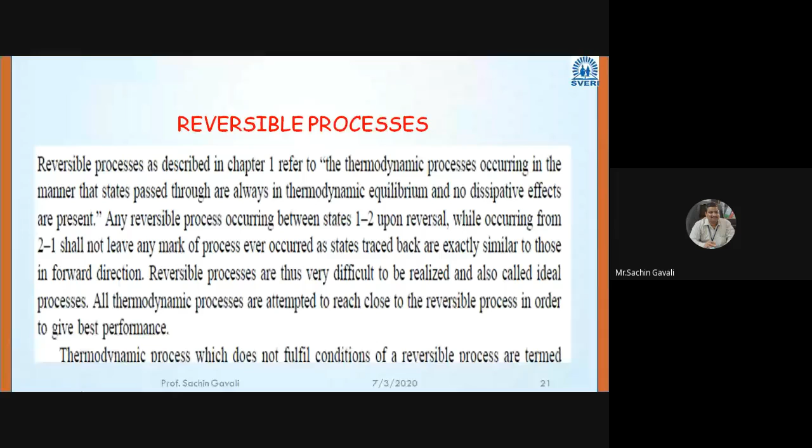The second thing is that both system and surrounding should come to the original state. It should not happen that only the system comes to the initial state but the surrounding does not. That kind of process we cannot call reversible. Both system and surrounding should come to the original initial state, then we can call it a reversible process.

Sometimes the system may come to the initial condition but the surrounding does not. In that case, to come to the initial state, the system has to take some extra amount of work or heat from the surrounding, so the system leaves a trace on the surrounding. This should not happen in case of a reversible process.

Both should come back: if in the forward direction the system has given the surrounding 10 kilojoules of heat, in the reverse direction the system should take 10 kilojoules of heat from the surrounding to come to the initial state. It should not happen that while reversing it takes some extra amount of heat. Within 10 kilojoules only, the system has to come to the original state - both should come to the initial state.

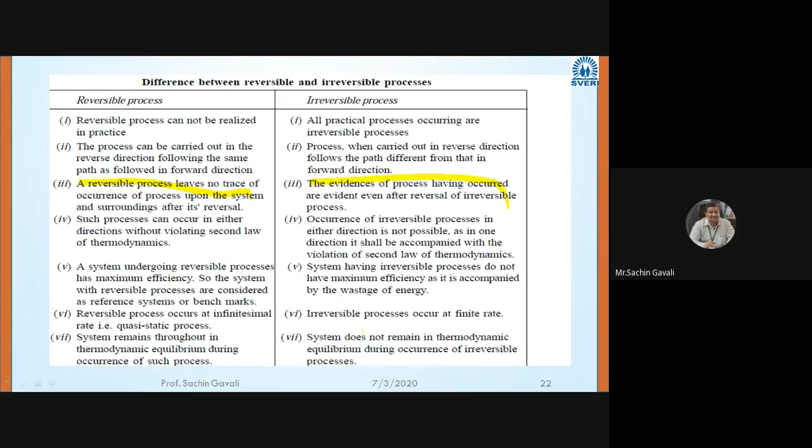There is always thermodynamic equilibrium between system and surrounding at every stage in a reversible process. But in irreversible processes, there is no thermodynamic equilibrium at every stage between system and surrounding. There are examples of this.

Very few processes are considered reversible processes. For example, frictionless motion, controlled expansion and compression, elastic deformation, and electric current where no resistance is present.

But irreversible processes - all other processes in the universe are irreversible processes. For example, viscous fluid flow, inelastic deformation, hysteresis effect, and free expansion. All these are considered under irreversible processes.

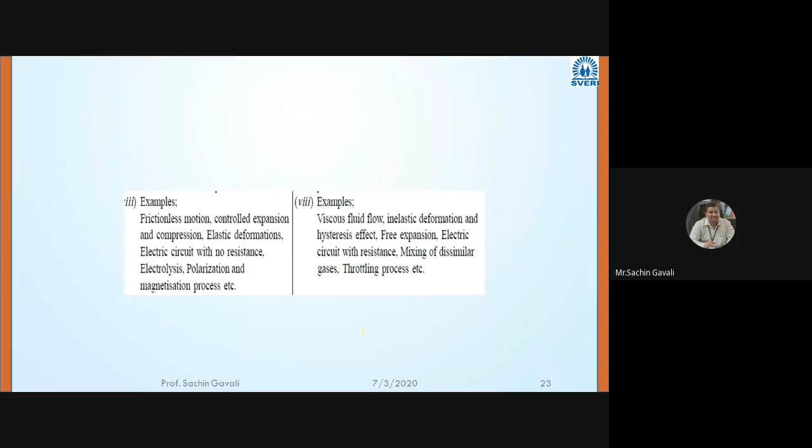So only a few processes, where the rate of compression and expansion is infinitesimal and the rate of heat transfer is infinitesimal, are called reversible processes. Other than reversible, everything else is irreversible.

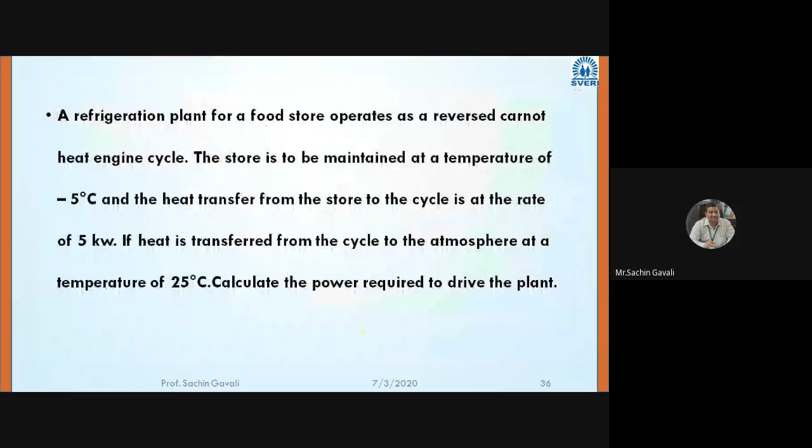Afterwards we take up one cycle which consists of all reversible processes, and that cycle we discussed is the Carnot cycle. This cycle was suggested by Sadi Carnot, and it consists of all four processes as reversible processes. Since in the universe very few processes are reversible...

Hence it is very difficult to achieve the Carnot cycle. As reversible processes are very few and do not occur in the universe, the Carnot cycle remains only on paper, a dream cycle, or purely hypothetical phenomena. Therefore this Carnot cycle remains an ideal or dream cycle, and it consists of a piston and cylinder arrangement, considered frictionless since we don't want friction between piston and cylinder.

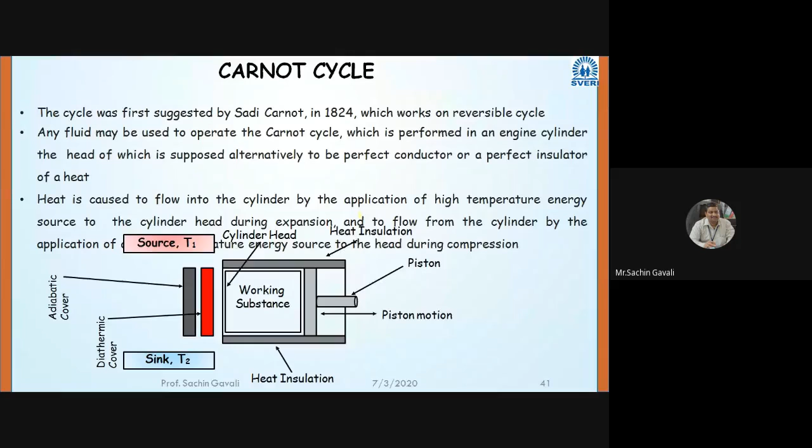Then all four processes are there, as assumptions we have made: the piston moving in the cylinder does not develop any friction during motion; the walls of the piston and cylinder are considered perfect insulators of heat; then the cylinder head...

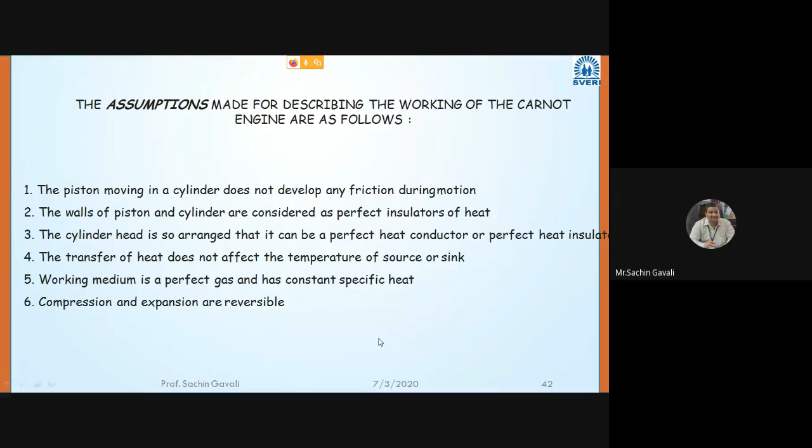Transfer of heat does not affect the temperature of source and sink, because both source and sink temperatures always remain constant. Then we move on to the four different processes.

Isothermal expansion is the first process. Second is adiabatic expansion. During isothermal expansion, heat is supplied, so some books refer to this first step as heat addition at constant temperature, or isothermal heat addition.

This is adiabatic expansion - we are getting work from the fluid, and work is obtained from this process.

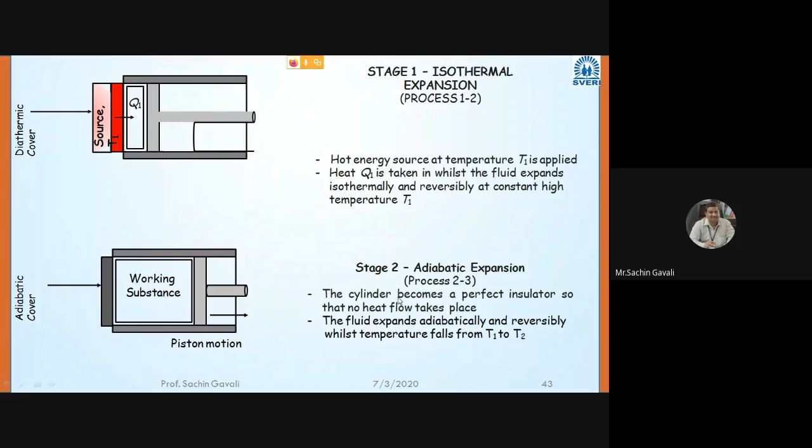Next is isothermal compression, or heat rejected at isothermal condition, isothermal heat rejection - stage 3. In some books this is written as heat rejected isothermally or isothermal heat rejection. The last stage requires us to supply some work in compression.

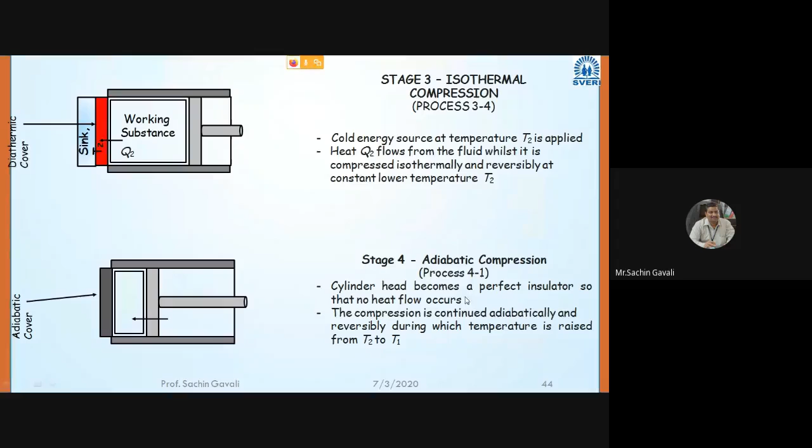That is adiabatic compression. So these four steps are there.

This is isothermal heat addition here. One to two process is isothermal heat addition where Q1 amount of heat is added.

We will now simultaneously go for two diagrams: PV diagram on the left hand side, and TS diagram on the right hand side.

In the PV diagram, 2 to 3 is adiabatic expansion, where we get work W from this process. Then 3 to 4, here we are rejecting heat, Q2 amount of heat. And 4 to 1 is adiabatic compression, where we have to supply work for the pump.

Here, 1 to 2, T1 is equal to T2 during heat addition, and T3 is equal to T4. But for simplicity, we consider T1 as the heat addition temperature, and T3 equal to T4 as T2, the heat rejection temperature.

Now, as we have learned, isothermal heat addition is given by the work obtained during that process, because cyclic integral of work equals cyclic integral of heat. Therefore Q1, the amount of heat supplied, is equal to the work done during the 1 to 2 process.

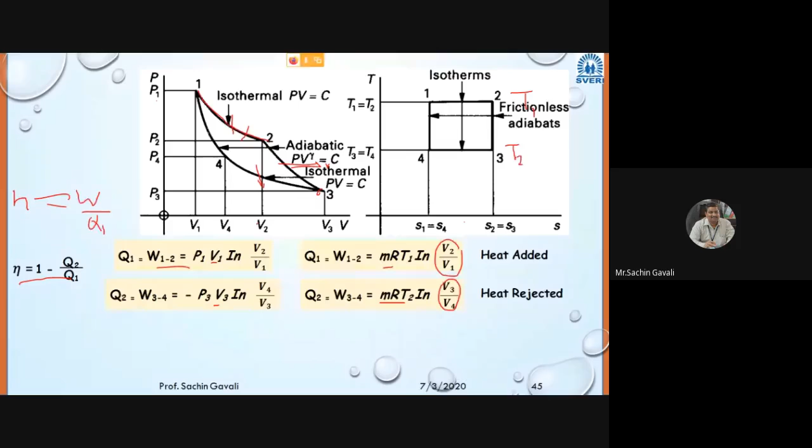For that we take the help of the remaining processes: adiabatic expansion and adiabatic compression. First, adiabatic expansion 2 to 3: P2 V2 raised to gamma equals P3 V3 raised to gamma, equation 1. Then adiabatic compression: P4 V4 raised to gamma equals P1 V1 raised to gamma, equation 2. Then by PV equals nRT.

Therefore PV by T equals nR equals C, we also consider that. Then P2V2 upon T1 equals P3V3 upon T2 — this is the ideal gas equation. Then P4V4 upon T2 equals P1V1 upon T1, which is also valid here since we considered the gas as an ideal fluid.

Now rearranging mathematical terms, dividing equation 1 by 3, after applying all conditions we get T1 times V2 raised to gamma minus 1 equals T2 times V3 raised to gamma minus 1. Dividing equation 2 by 4, we get T1 V1 raised to gamma minus 1 equals T2 V4 raised to gamma minus 1.

Then if we divide this equation by that one, the T1 terms get cancelled, and this term becomes V2 upon V1 raised to gamma minus 1 equals V3 upon V4 raised to gamma minus 1.

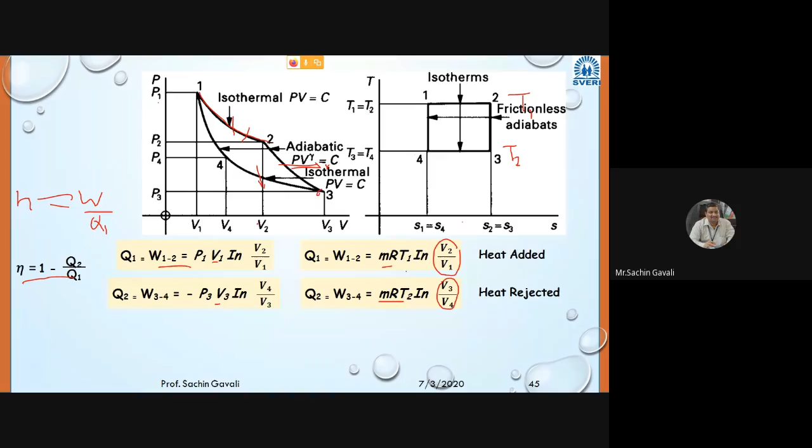As we know, equation eta is equal to 1 minus Q2 upon Q1. So this indicates, what will be there in Q2 upon Q1? From the previous slide, V2 upon V1 is same as V3 upon V4. Therefore, ln of V2 by V1 and ln of V3 by V4 will be same, so mR will also get cancelled, and this will become T2 upon T1. So finally, the efficiency of Carnot cycle engine or reversible cycle engine is given by equation eta is equal to 1 minus T2 upon T1.

Now this is the expression for efficiency of Carnot cycle, given by this expression. This indicates that efficiency of Carnot cycle is a function of only two temperatures.

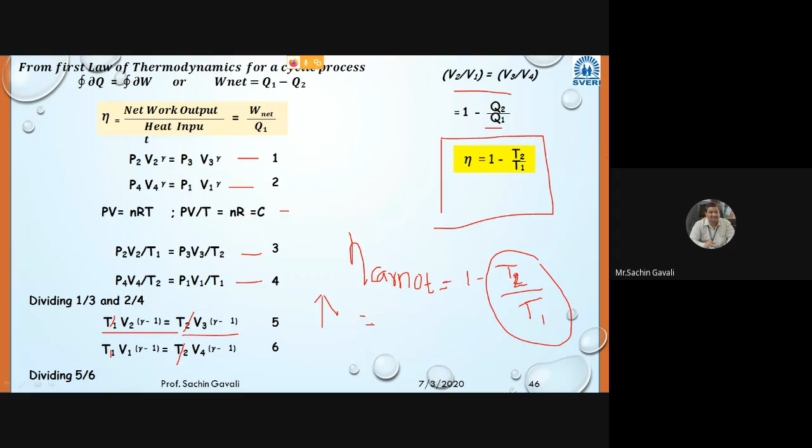Forget about other cycles, but ideal cycle efficiency is also not 100%. So this we have completed. Then here we have gone for the diagram: 1 to 2 heat addition, then heat rejection Q2, then we are getting the work here. We get work, and here we have to supply the work.

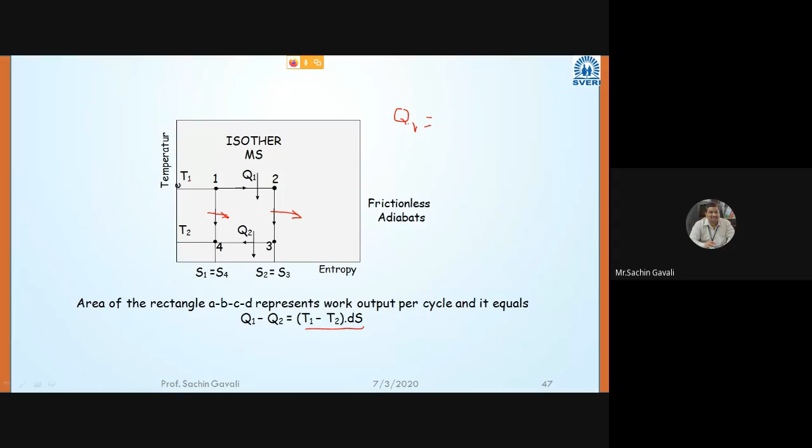So heat supplied in that isothermal process, you can say heat transfer is equal to change in entropy S2 minus S1, but S3 minus S4 and S2 minus S1 both are same. Therefore, we can say it is temperature T1 at which T1 into ds. And similarly, heat rejected Q2 is equal to S3 minus S4, equal to delta S. Both are same, coming same ds. Therefore, Q2 is equal to T2 into ds.

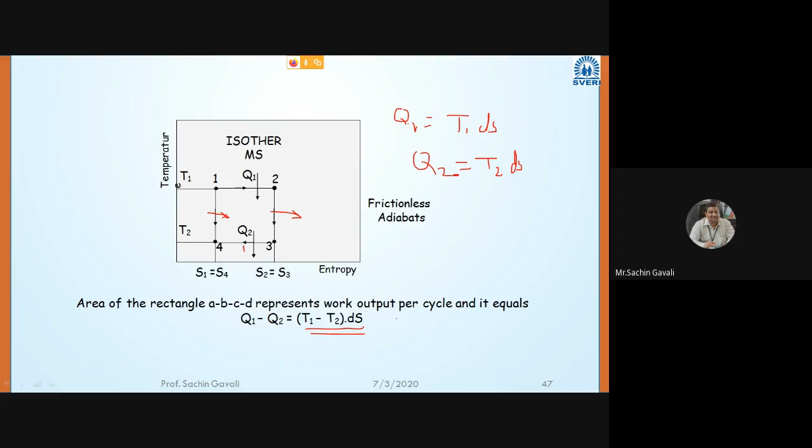And therefore, Q1 minus Q2 is equal to work obtained, net work obtained is coming as T1 minus T2 into ds. And efficiency again, simply as per whatever derivations we referred before, this can also be simplified as eta Carnot is equal to 1 minus Q2 upon Q1 reversible, or you can say Q1 minus Q2.

It can be written as Q1 minus Q2 divided by Q1. Here Q1 minus Q2 is equal to ds T1 minus T2 into ds. T1 minus T2 into ds divided by Q1 is nothing but T1 into ds. Change it, ds is going to be same, so ds will get cancelled, and efficiency formula will become eta is equal to T1 minus T2 divided by T1, or simply 1 minus T2 upon T1.

So I request you to note down the formula. For Carnot cycle efficiency, we say eta. Carnot cycle is a maximum cycle, it is an ideal cycle. Therefore, efficiency of Carnot cycle is always maximum. Though it is less than 1, it is maximum compared to other irreversible cycles. Therefore, eta reversible is equal to eta maximum, given by equation 1 minus Q2 upon Q1 reversible, or 1 minus T2 upon T1.

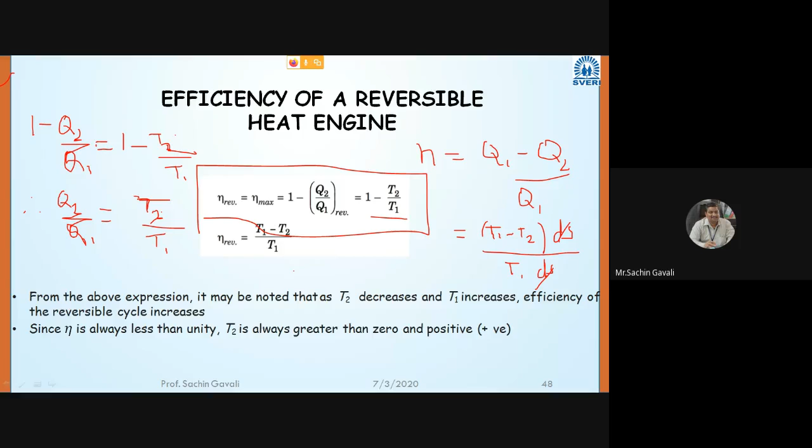1 minus 1 minus will get cancelled. Therefore, for Carnot cycle, we see that Q2 upon Q1 is also equal to T2 upon T1. So note down this: Q2 upon Q1 is equal to T2 upon T1. So 1 minus Q2 upon Q1 is also equal to 1 minus T2 upon T1, therefore Q2 upon Q1 is equal to T2 upon T1. This is also valid for Carnot cycle. So T1 minus T2 upon T1 is equal to Q1 minus Q2 upon Q1. It is valid only for reversible cycles or Carnot cycle.

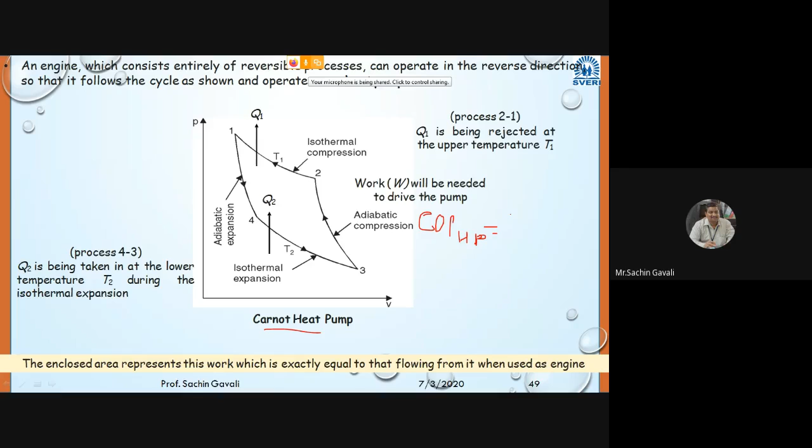Write this down also in your notebook. For Carnot heat pump, COP of heat pump is equal to, what is our formula? Q1, heat supplied. We are interested in heat supplied divided by net work W.

This W is equal to what? We know it is equal to Q1 divided by Q1 minus Q2. So this formula everybody should remember. Write down: COP of Carnot heat pump is equal to Q1 divided by W, which is equal to Q1 divided by Q1 minus Q2. This is also valid, and there is validity for this. Write down for Carnot heat pump.

Again, temperature ratios are also the same. Q1 divided by Q1 minus Q2 is also equal to T1 divided by T1 minus T2. This is also valid for Carnot heat pump only. So when a numerical problem comes for Carnot heat pump, what do we write? Q1 divided by Q1 minus Q2 is equal to T1 divided by T1 minus T2. This is for Carnot heat pump.

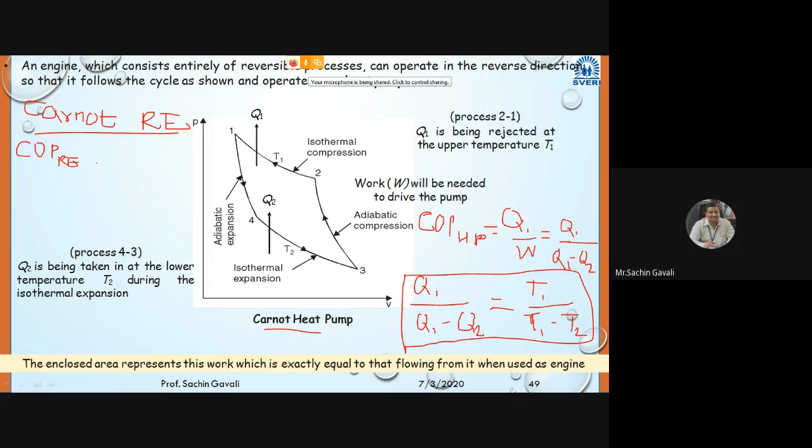COP of refrigerator is equal to what? Now what is the intention for a refrigerator? Anybody? Is it heat absorbed or heat supplied? Somebody can reply so that I can get that response. For a refrigerator, what is the input? What is expected? How much amount of heat absorbed or supplied?

Q2 is supplied, Q1. So if we consider the cycle of a refrigerator, heat is absorbed, meaning Q2 amount of heat is absorbed. So our intention is Q2 divided by work W. We know that W is equal to Q1 minus Q2. Therefore it becomes Q2 divided by Q1 minus Q2. Remember that.

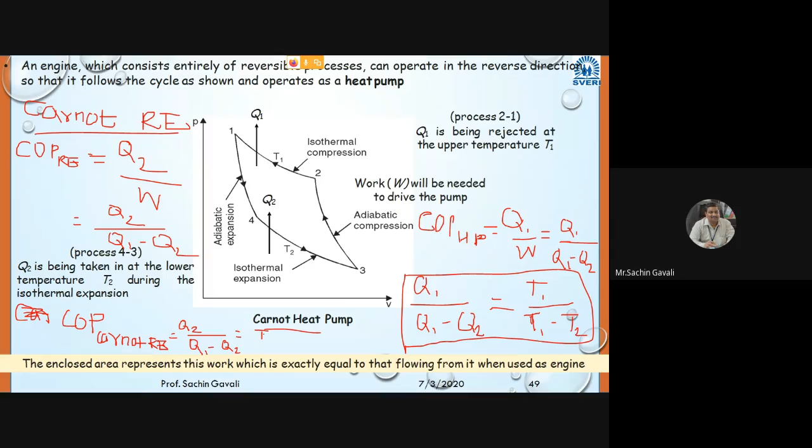For a Carnot refrigerator, Q2 divided by Q1 minus Q2 is also equal to the temperature ratio. Therefore, T2 divided by T1 minus T2. Write down the formula.

Carnot refrigerator COP is also given by heat interactions: Q2 divided by Q1 minus Q2 is also equal to T2 divided by T1 minus T2. So whether it is Carnot cycle engine, heat pump, or refrigerator, COP or efficiency are also functions of two temperatures: the heat addition temperature and the heat rejection temperature.

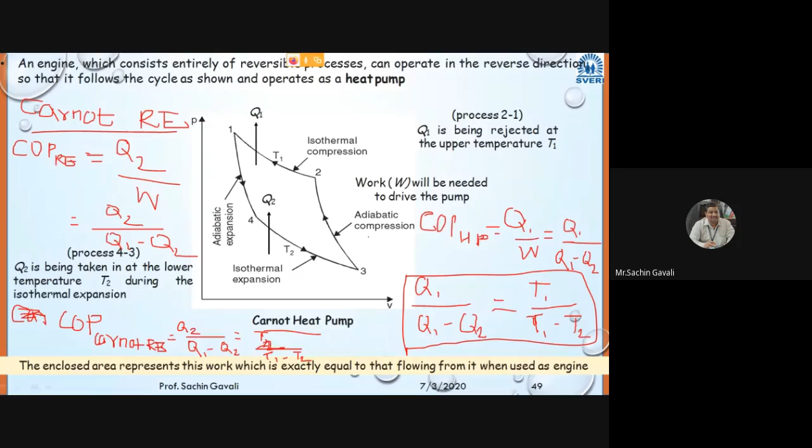So this is general, in terms of heat. These formulas are general; they may be applicable for reversible cycles or irreversible cycles. Everybody has to remember this formula. Without it, we cannot solve the numericals.

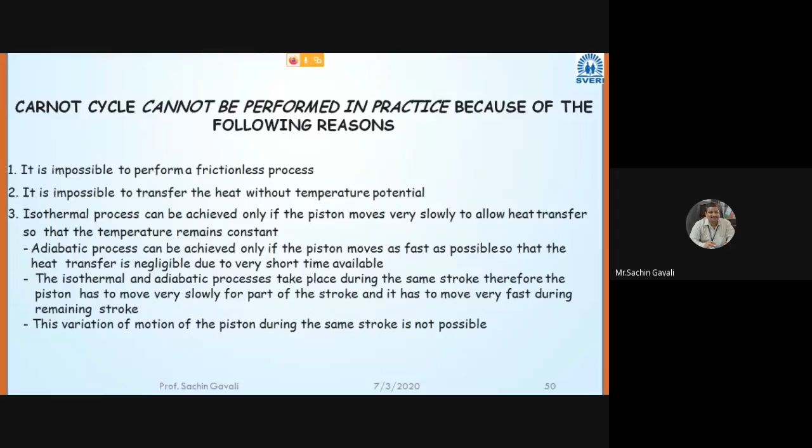Carnot cycle cannot be performed in practice because of the following reasons, which we partially covered. It is impossible to perform a frictionless process; there is always friction present between two things. Also, it is impossible to transfer heat without a temperature difference, meaning isothermal heat addition and isothermal heat rejection are not possible.

An isothermal process can be achieved only if the piston moves very slowly, that is, quasi-statically, to allow heat transfer at an infinitesimal temperature difference. Due to these reasons, isothermal heat addition and rejection are not possible, and a frictionless process is impossible. If the piston moves fast, the quasi-static process is not possible either. Therefore this cycle remains only on paper; it is not practically possible. Carnot cycle is only a theoretical, ideal, hypothetical cycle, not giving any idea about the actual case.

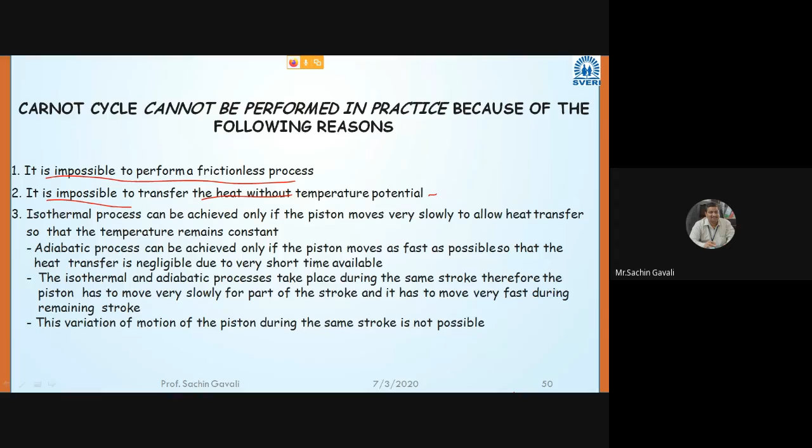We covered the Carnot cycle that day, but I am taking revision because there was a sound problem and some visibility issue, so I am going through it again slowly. That day I had not asked you to write down the formulae, but today I realized that without formulae you cannot solve the numericals.

Is it okay? Somebody can reply, otherwise I feel I am only speaking. Are you watching or not? Yes sir, there should be some interaction.

Now, that day I think we also covered the equivalence of the Clausius statement to the Kelvin-Planck statement, or in general, the equivalence of the second law of thermodynamics, because both the Clausius statement and the Kelvin-Planck statement are statements of the second law of thermodynamics. So it is simply called the equivalence of the second law of thermodynamics.

Now, what is equivalence? These two statements: if we look at the Kelvin-Planck statement, we apply it for heat engines, so I'll write it in short as KP for heat engine. The Clausius statement we generally apply for heat pumps. If we study both statements of the second law, Kelvin-Planck and Clausius, both are different, the wording is different, and physically they also look different. Kelvin-Planck's statement applies to heat engines, and Clausius's applies to heat pumps.

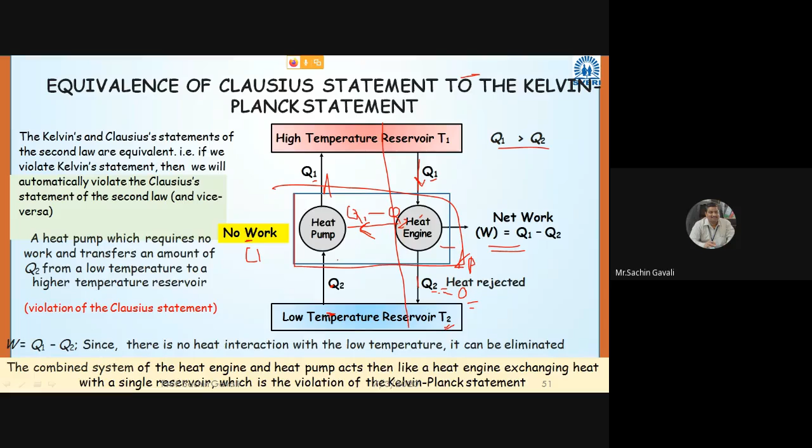So in our combined case, incoming is Q1, work developed is Q1 minus Q2, and this is rejected. For this Q1 minus Q2, the Q2 should be equal to zero, because all the net work is supplied to the heat pump. Therefore Q2 becomes zero, no heat is rejected by this combined device. Therefore we say the Kelvin-Planck statement is also violated.

Meaning, initially the Kelvin-Planck statement was correct, but as the Clausius statement was shown to be wrong, the Kelvin-Planck statement in the combined device also showed wrongness. This is called the equivalence of the second law of thermodynamics. Similarly, violation of the Kelvin-Planck statement leads to violation of the Clausius statement also.

Here we see in this device, a heat engine and heat pump are there. It is extracting Q2 amount of heat, taking work W, and rejecting to the high temperature reservoir Q1.

But what about Kelvin Planck statement now? Kelvin Planck statement is taking Q1 amount of heat, developing W equal to Q1, supplying to this heat engine, and Q2 becomes 0. So Kelvin Planck statement will become false, or violation.

Now this is the individual case. Clausius is true, Kelvin Planck is violating.

But in the common device, what is acting? Here this heat pump is taking work from the heat engine W, not taking from external. So external work is not there, only internal work W equal to Q1. It is taking and supplying Q2 amount of heat from the low temperature reservoir to the high temperature reservoir.

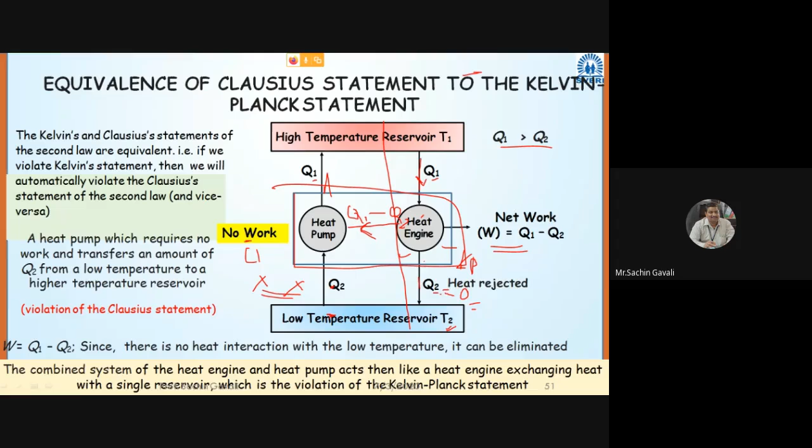This means something is there in between them, some relationship, and that is called the equivalence of the second law of thermodynamics. In short: violation of Kelvin Planck statement leads to violation of Clausius, or vice versa. Vice versa means violation of Clausius statement leads to violation of Kelvin Planck statement. In a common device, if one statement is violating, the other statement also violates. That is called the equivalence of second law of thermodynamics.

Now on that we have seen an example: a fridge is there in the room, and if the doors of the refrigerator are open, and electricity is given to the refrigerator, whether the room will heat or cool. Maximum students already gave the answer: it is heating, and it was correct.

So now on that day we have also quickly covered the Carnot theorem. What is Carnot theorem? If a heat engine, one is reversible engine and another is irreversible heat engine, working on irreversible processes and one on reversible processes, which engine's efficiency will be more if their temperature limits are same?

Reversible heat engine has more efficiency. So write down: efficiency of reversible heat engine. Give it the name Carnot theorem, write down Carnot theorem.

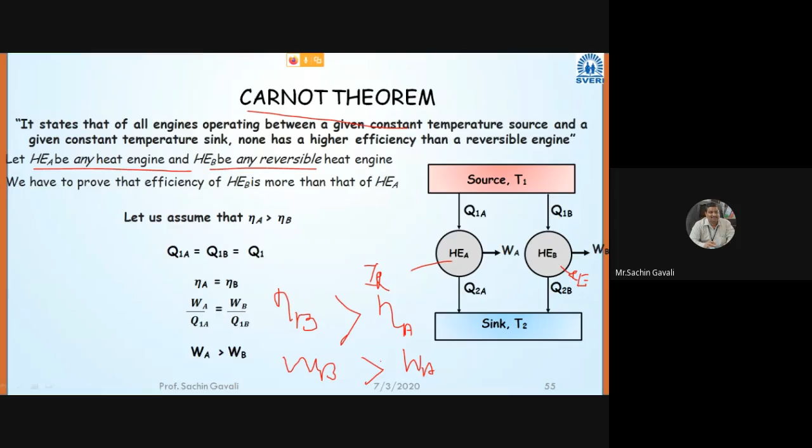Means what? Here I will supply this PPT diagram. Efficiency of which engine is reversible? HEA heat engine, HEB is reversible. So HEB is reversible, therefore here eta B is always greater than eta A, or WB is greater than WA. This proof is given where eta B is reversibility engine, A is irreversibility engine, meaning work obtained from the reversible engine is always more than work obtained from the irreversible engine.

Now, this proof is not there for our syllabus. Then another theorem is there: if both heat engines are reversible, and their temperatures of source and sink are same, then what about efficiency? So here one statement is given. Anybody write down, here this is going to be the statement. Write down here.

Corollary of Carnot theorem, we can say Vyatyas in Marathi. Theorem means pramay. Corollary of Carnot theorem is also called as Carnot theorem 1.

Write down: efficiency of all reversible heat engines operating between same temperature limit is same.

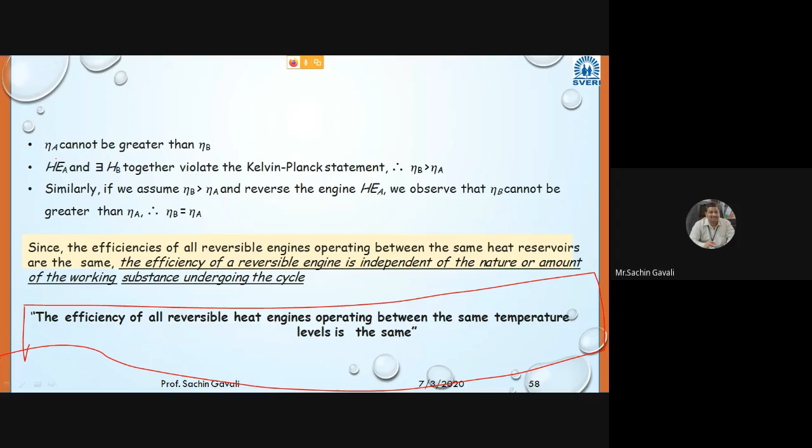We can generate similar statements, no problem. But understanding is that reversible heat engines, both having same source temperature and sink temperature, have same efficiency or can generate same work if the temperature limit is going to be same. Now we have studied reversible and irreversible processes.

First law of thermodynamics was not telling whether the given process is irreversible or reversible. Now for that, Clausius, in our second law of thermodynamics statement, came with another principle, another theorem, and that is called as Clausius inequality.

It is called as Clausius inequality. Write down, now write down Clausius inequality. Everybody, I request you to write down.

Otherwise, if these small highlighting points are not with you, it is very difficult to solve the numericals. Today I am taking a very slow lecture because for the last 2 lectures I think there was an internet problem, the sound problem was there, and the visibility problem was there. Today we are getting good contact, good internet, no sound problem, and good visibility. Therefore I am taking this lecture slowly.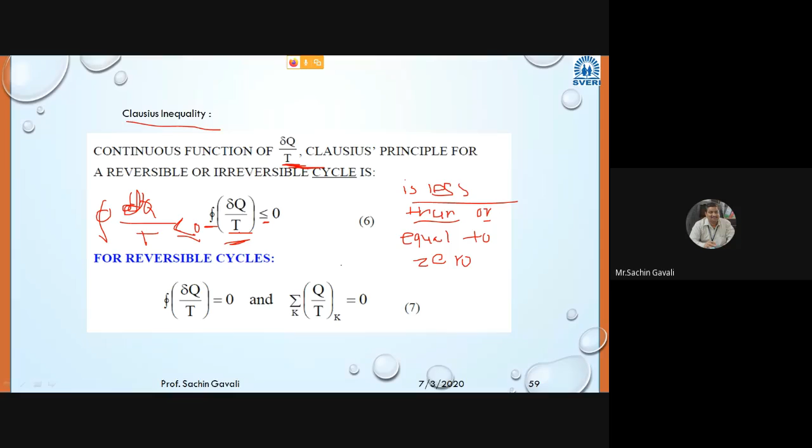Significance of Clausius inequality. Write down case 1. In that, write down first point: if, mathematically, cyclic integral, whatever I have underlined.

Cyclic integral of dq by t is equal to 0. If this cyclic integral of dq by t is equal to 0, then the cycle is reversible. MCQs may ask this: if cyclic integral of dq by t is equal to 0, then that process or cycle is reversible. Everybody getting how to identify whether a cycle or process is reversible or irreversible? During that process we have to calculate this cyclic integral of dq by t, and if it is equal to 0, then that is called a reversible cycle.

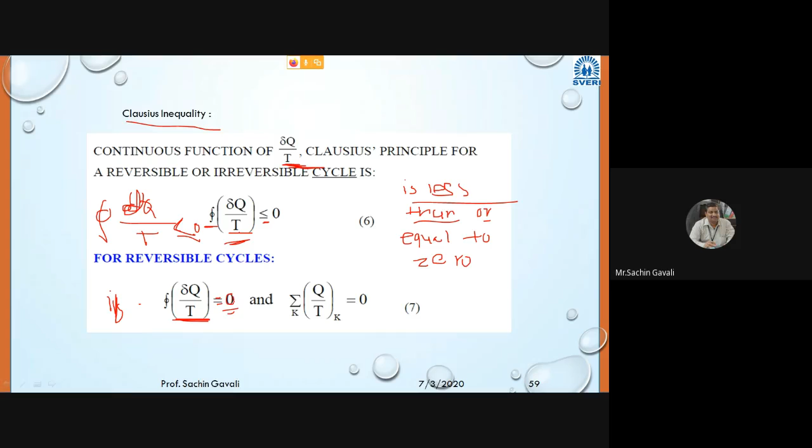Now second case, write down. If cyclic integral of dq by t is less than 0, then who will tell what happens to the cycle?

The cycle is irreversible. If cyclic integral of dq by t is less than 0, then that cycle is an irreversible cycle.

Case 2 is written. Now write down case 3 also. It is not written here on the PPT, so I will write case 3. With me, you write down case 3 - the third significance of Clausius inequality.

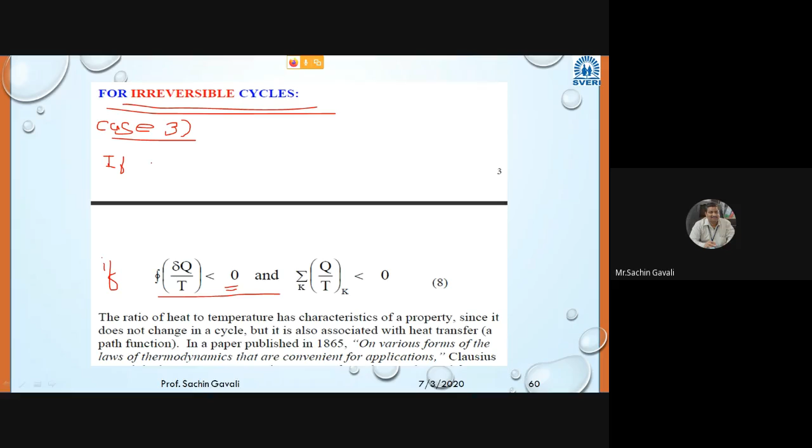If cyclic integral of dq by t is greater than 0, then the cycle is impossible. We haven't taken this condition before, but it is never possible for a cycle or process in this case - it is impossible.

Okay, so I think who will tell now all three cases of Clausius inequality, so that I can take some rest. Suhas, are you there? Yes, sir. Read it, otherwise - if you are reading, then good, it will be appreciable. Suhas, read the Clausius inequality and its significance one by one.

Clausius inequality: mathematically, cyclic integral of dq by t is less than or equal to 0. Significance of Clausius inequality: Case 1, if cyclic integral of dq by t is equal to 0, then the cycle is reversible. Case 2, if cyclic integral of dq by t is less than 0, then the cycle is irreversible. Case 3, if cyclic integral of dq by t is greater than 0, then the cycle or process is impossible. Good, very nice, Suhas, thank you.

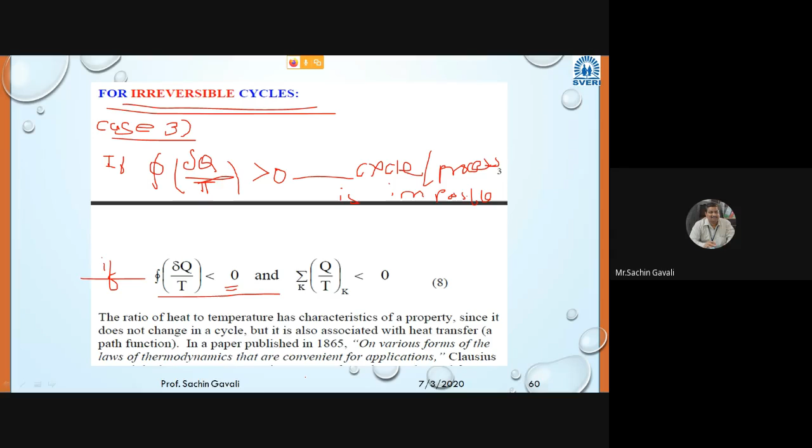Now, how do we calculate the cyclic integral? Very simple - cyclic integral of dq by t. Now, we are considering one heat engine. This heat engine has a source at temperature, and it is taking Q1 amount of heat.

This heat engine is taking Q1 amount of heat and rejecting Q2 amount of heat to the sink at temperature T2, developing work equal to W, where heat engine work W is equal to Q1 minus Q2. This is the entire cycle.

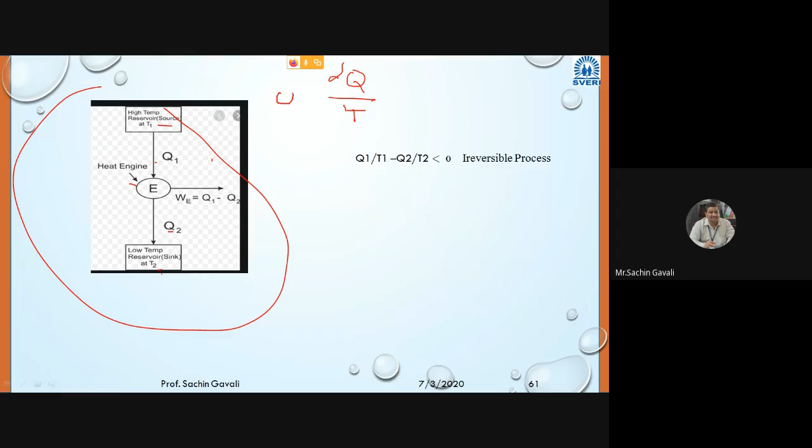Now how do we calculate this cyclic integral of dq by t? Cyclic means the integration taken over the cycle.

It means summation. Integration is nothing but summation. So what is being summed? Heat interaction, dq, divided by the temperature at which it is interacting.

Now here Q1, what is the heat interaction? Q1 is supplied, therefore it is positive, considering sign convention. Q1 is positive, divided by the temperature at which it is supplied, which is T1. So we get Q1 divided by T1, plus, since summation means plus.

In bracket now, Q2. But what is Q2? Heat rejected. And heat rejected, do we consider it positive or negative? By the sign convention of heat, it is negative.

Negative. Therefore Q1 divided by T1 plus minus Q2 divided by T2, because heat is rejected. So for this heat engine, this is the cyclic integral of dq by t: Q1 divided by T1 plus minus Q2 divided by T2, or simply Q1 divided by T1 minus Q2 divided by T2, since the minus sign gets absorbed.

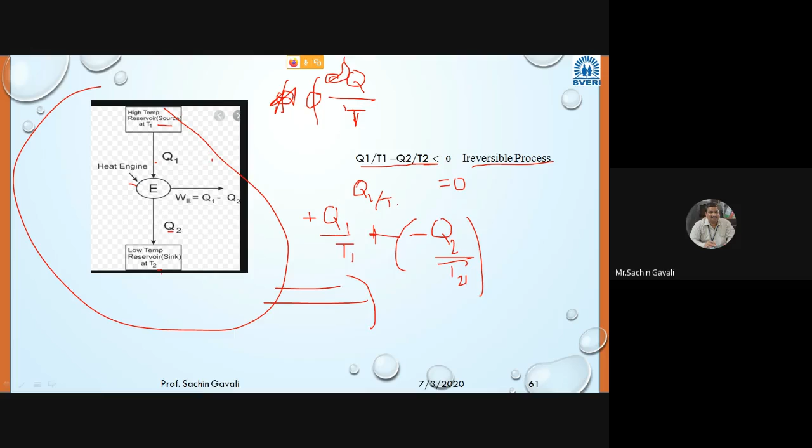And if it is coming less than 0, then the cycle is irreversible. If it is coming equal to 0 for Q1 upon T1 minus Q2 upon T2, then the cycle is reversible.

Good. Now draw the diagram and write down the calculation of dq by t. For our understanding, in the notebook write the heading and subheading: Calculation of cyclic integral of dq by t.

Write down this diagram: one source at temperature T1, supplying Q1 amount of heat to the heat engine. Instead of writing 'heat engine' here, you can just write HE. And it develops W equal to Q1 minus Q2, rejecting to the low temperature reservoir.

Then draw the diagram and write down: cyclic integral of dq by t is equal to Q1 divided by T1 minus Q2 divided by T2. If it is less than 0, irreversible; if equal to 0, reversible.

Draw the diagram, then write down what is meant by cyclic integral of dq by t. Here write: cyclic integral of dq by t is equal to Q1 divided by T1 plus minus Q2 divided by T2. Why minus? Because the minus sign indicates that it is rejected. So Q1 upon T1 plus minus Q2 upon T2, which equals Q1 upon T1 minus Q2 upon T2. This way everybody has to calculate the cyclic integral of dq by t.

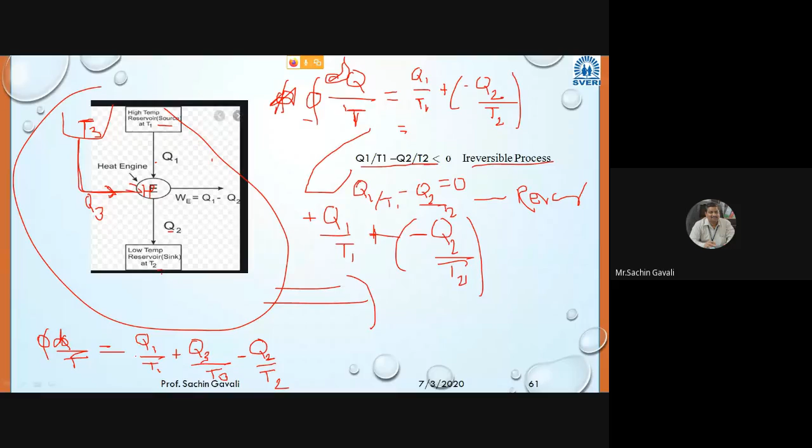Anybody? Q1 divided by T1, I will write. Q1 divided by T1 plus Q3 divided by T3, minus Q2 divided by T2 is equal to 0. Minus, because here heat is rejected, so it should be minus. So in that case, the cyclic integral of dq is equal to Q1 divided by T1 plus Q3 divided by T3, because it is supplied by the reservoir, minus Q2 divided by T2.

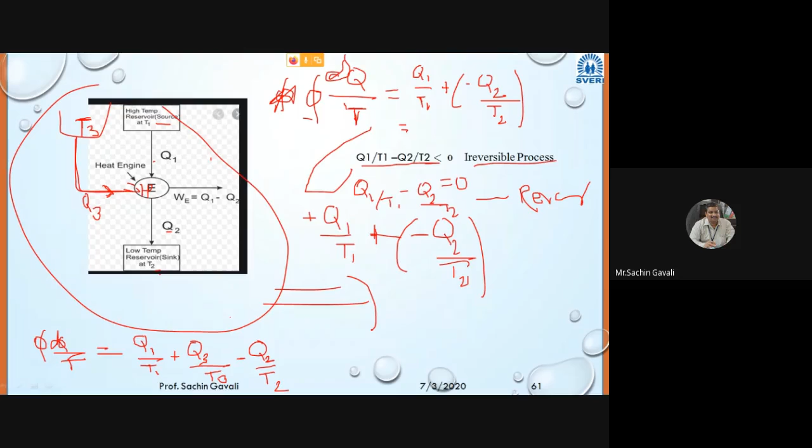And if this calculation comes to 0, then the cycle is reversible. And if it is not coming 0, then the cycle is irreversible. So this basic concept is required for us to solve the numericals.

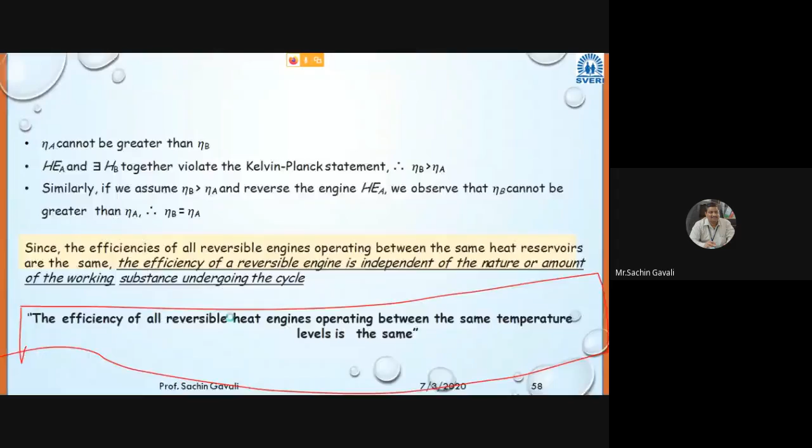Because on that day I have taken numericals, some formulas were there, but at that time we have covered one. Now we'll go for numericals.

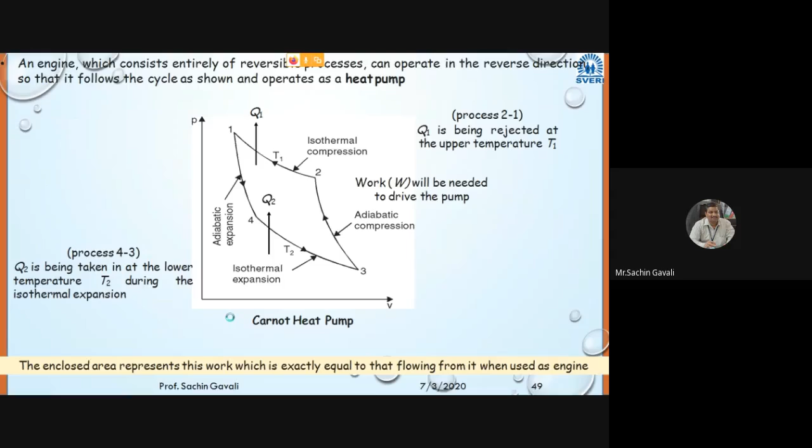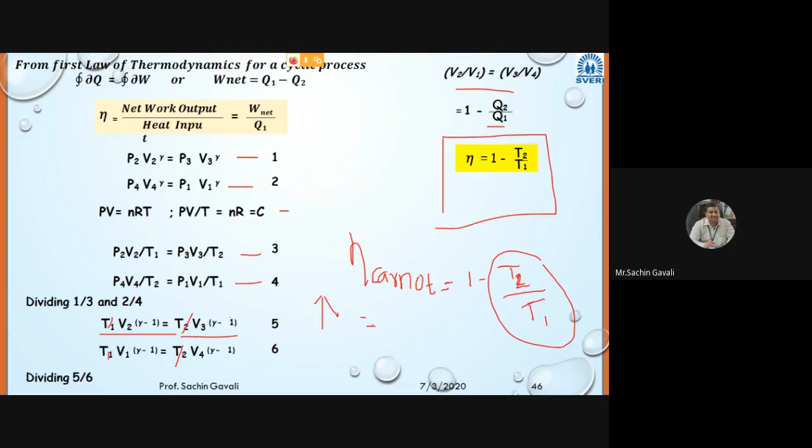I think many students are coming just for attendance. Such things should not happen. Rohit Dundle, only writing roll number. When I will ask you to put your roll numbers, give attendance. At that time you can write your roll numbers. Now everybody will get that Rohit came for giving attendance only. Why are you worrying?

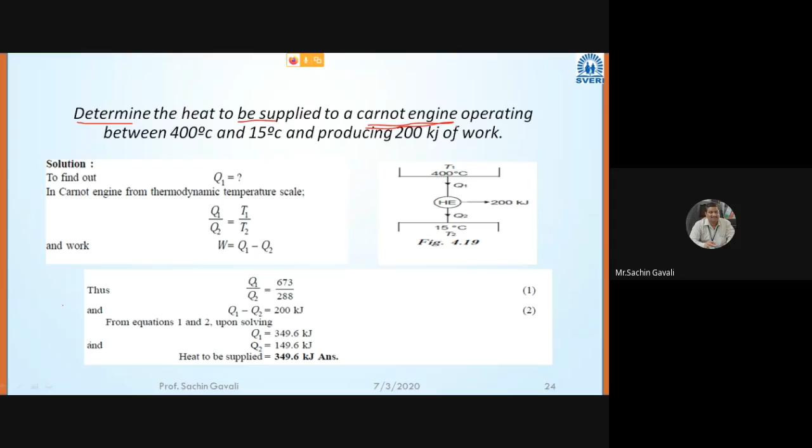Okay, now here one numerical. First numerical. First don't go for direct solution, don't see the solution. Determine the heat to be supplied to a Carnot engine. Now here it is not just any heat engine because many numericals consist of Carnot cycle involved in it. Carnot engine operating between 400 degrees Celsius and 15 degrees Celsius and producing 200 kilojoule of work. Determine heat to be supplied.

Now what is given? Heat engine operating means what? W is given. So draw the schematic for this. The heat engine has source temperature 400 degrees Celsius, and it is giving Q1 amount of heat to the heat engine, developing W is equal to 200 kilojoule, and rejecting heat equal to Q2. And the other temperature the heat engine is working between is 15 degrees Celsius. Then they ask, what is Q1.

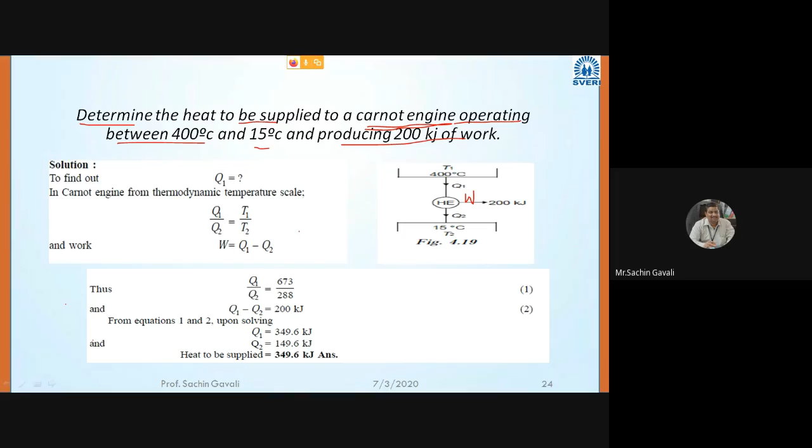Now, as this heat engine is a Carnot heat engine, what we can say? Q1 divided by Q2 is equal to T1 divided by T2. Okay, now here W is equal to Q1 minus Q2.

First calculate, we want to calculate Q1. W is equal to Q1 minus Q2. Therefore Q1 minus Q2 is coming as... what is the ratio? Here we know Q1, T1 means here remember that temperature should always be in Kelvin. So plus 273. 400 plus 273 is 673. And Q2, temperature T2 is 15 degrees Celsius, which means 288 Kelvin. So both should be in Kelvin.

Then Q1 divided by Q2 is coming as this, and Q1 minus Q2 is equal to W is equal to 200. So these two equations are there with us: one is Q1 divided by Q2, and another is Q1 minus Q2. If we solve this, we get Q1 is equal to 349.6 kilojoule, and Q2 is 149.6 kilojoule.

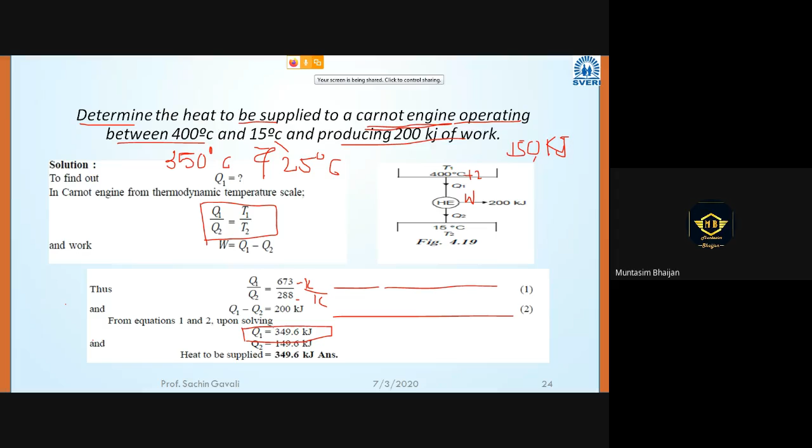Good, good, good, good. So Bhaijan is also there today. Yes sir, present. Okay. So last few lectures we have faced the problems of internet. Today going well, na? Yes sir, well, everything fine. Let's hope that everything in future also will be like this. Yes. Okay, Ganeswar Misal, okay, 287.

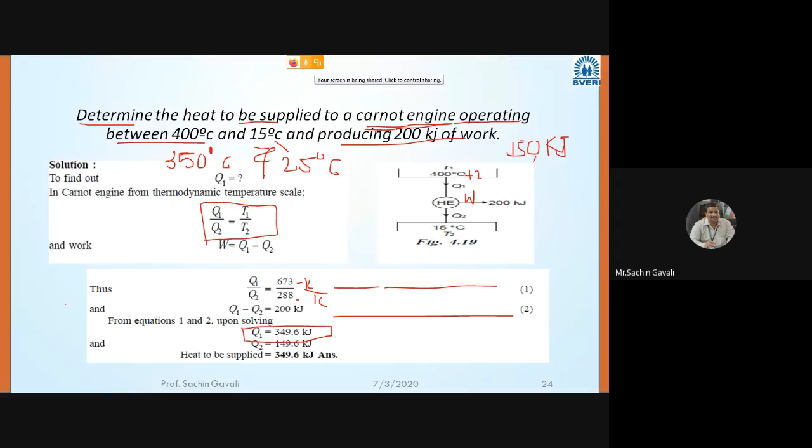No problem, and this kind of simple numerical they may ask for 4 to 5 marks. Only we should remember the formula of Carnot cycle efficiency, what is Carnot refrigerator, Carnot heat pump, Carnot heat engine. Okay, next problem.

Deepak Vibhuti, I congratulate all those getting the answer. Gorak, okay, Shaneshwar Swas, okay, 287.6 kilojoule.

Okay, then here: a domestic refrigerator maintains temperature of -8 degrees Celsius when the atmospheric air temperature is 27 degrees Celsius. Assuming the leakage of 7.5 kilojoule per minute from outside into the refrigerator, determine the power required to run this refrigerator. Consider refrigerator as Carnot refrigerator.

Now, a domestic refrigerator maintains temperature of -8 degrees Celsius. Means what is given? So it is source or sink temperature? Minus, less temperature means what? Sink temperature. So sink temperature is given as -8 degrees Celsius. And source temperature is what? T1 is equal to 27 degrees. So this is going to be T1, and this is going to be T2.

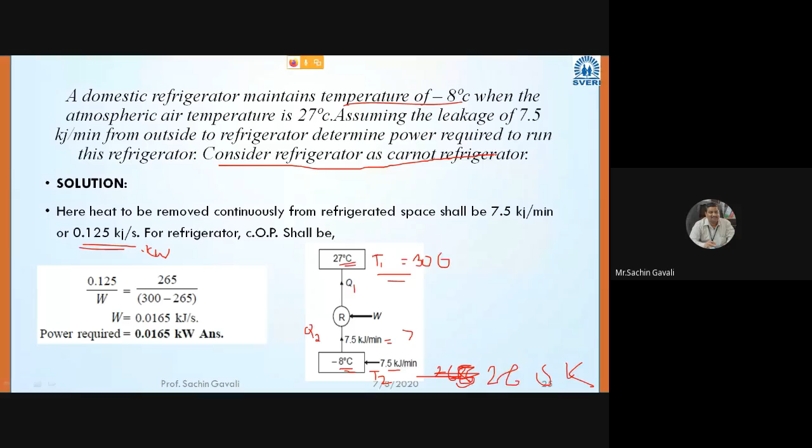It is equal to 0.125 kilojoule per second, or kilojoule per second we call it kilowatt. So this kilowatt amount of heat the refrigerator has to remove, and at the same time it requires some work W, and this refrigerator is Carnot refrigerator. Then how can we calculate? We have to calculate the work required.

So now I will solve here, in our simple way. So COP of this Carnot, I will say C for Carnot refrigerator. What is the formula for COP of Carnot refrigerator, if temperatures are known to us? Anybody? T1 divided by T1 minus T2... T2 divided by T1 minus T2. Write down.

So COP of Carnot refrigerator in this case will become T2 divided by T1 minus T2. We calculate COP in that case. COP of refrigerator, calculate. What is T2 coming as? We'll go in another method. So T2 is how much? T2 is 265.

265 divided by T1 minus T2, how much is it coming? 300 minus 265 is how much? 35, correct?

Write down our method. Then 265 divided by 35, how much is it coming? COP is coming as what? 265 divided by 35, I think it is coming 7.57.